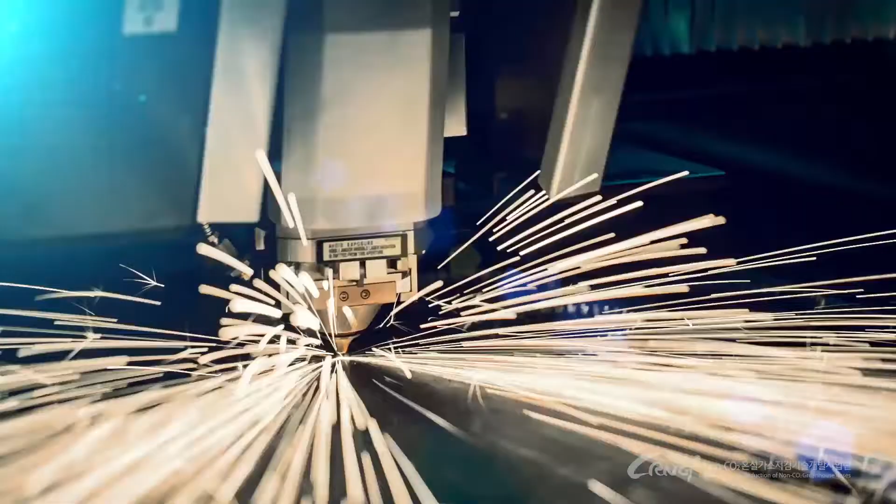A better tomorrow. A tomorrow needs sustainable technologies. Tomorrow needs green pioneers. R&D Center for Reduction of Non-CO2 Greenhouse Gases. We make a better tomorrow.

The Earth we are living in is a home to 7.4 billion people, 300,000 kinds of plants, and 1.5 million kinds of animals. It is a place that we should preserve for our children and future generations. Now, the Earth, however, is suffering from unusual weather and global warming.

Because the cause of this problem is attributed to the greenhouse gases, the United Nations manages to solve the problem. Generally, methane, nitrous oxide, and fluorinated gas are referred to as non-CO2 greenhouse gases. The non-CO2 reduction will be achieved easily by developing a cost-effective unit technology.

To develop non-CO2 reduction technology, Korea launched R&D Center for Reduction of Non-CO2 Greenhouse Gases in September 2013. We are developing the optimal reduction technology for each type of gases and sources.

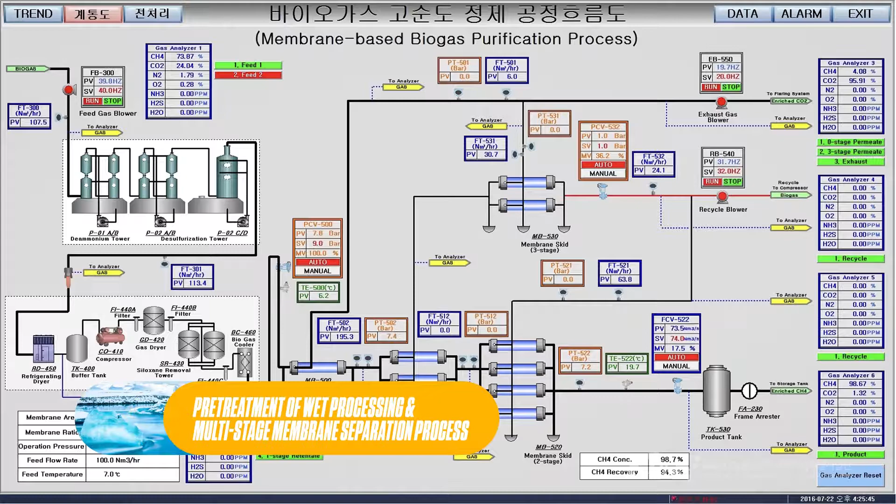This technology process consists of pre-treatment of wet processing and multi-stage membrane separation process. First, equipment to collect digestion gas is installed at the existing food waste treatment site to generate biogas. The biogas generated is pre-treated to remove foreign substances, such as moisture, hydrogen sulfide, siloxane, and ammonia.

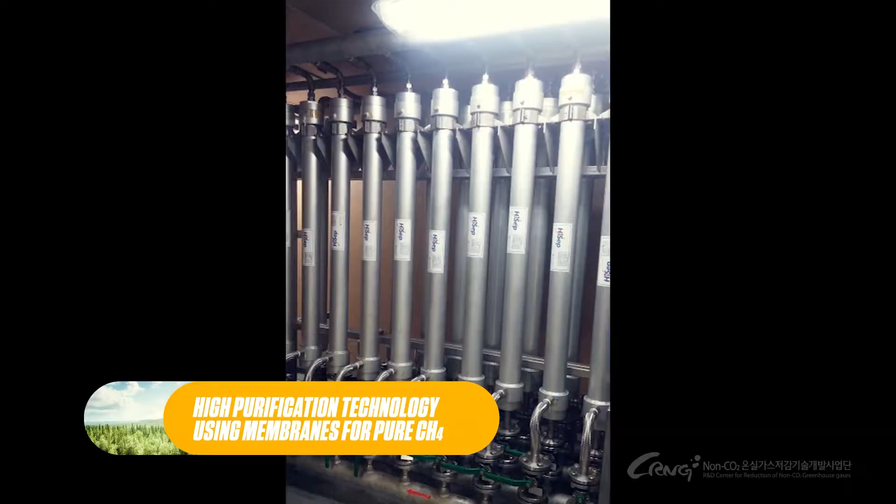And then the carbon dioxide is separated through high purification technology, using membranes, and pure methane gas is left. The newly developed membrane purification technology can reduce the size of a plant to 1/3 compared to existing purification technology, and has many advantages that do not require expensive catalyst and wastewater treatment.

Our methane purification membrane separation plants and original membrane technology using pre-treatment desulfurization technology take on a pioneering role in greenhouse gas reduction, as well as high-purity methane business.

Development of the technology of demonstrating for methane recovery and nitrous oxide treatment from anaerobic digestion gas of livestock manure. Methane with 21 times stronger greenhouse effect than carbon. Technology to reduce greenhouse gas and secure renewable fuel, using biogas as a valuable energy resource.

Our technology is an eco-friendly solution that can purify methane into a high degree of fuel and treat nitrous oxide from biogas discharged from livestock manure by utilizing membrane contactor process as a source technology. The membrane contactor is a process that allows both mixed gas and absorbent liquid to come into direct contact with each other, and then makes a specific gas with high solubility selectively absorbed into the absorbent to separate the mixed gas.

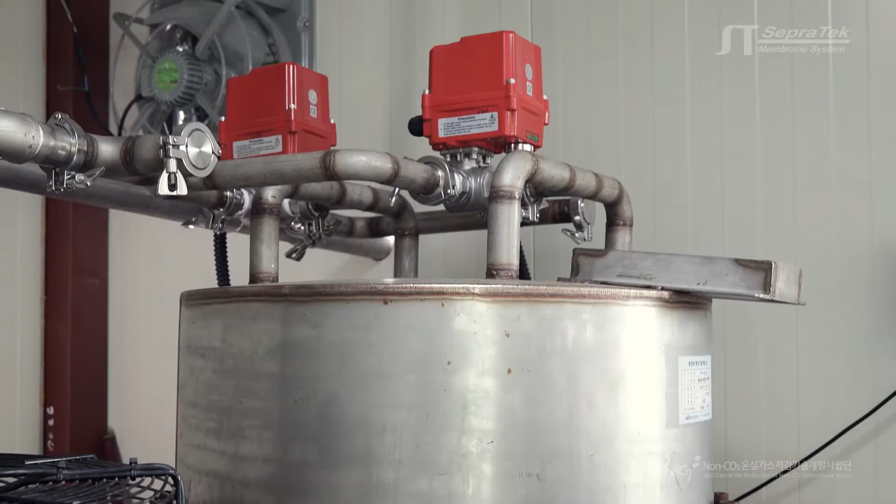This system goes through sequentially the following processes: pre-treatment of biogas, absorption of gas in membrane contactor, desorption of the absorbed gas in membrane contactor, and deodorization and greenhouse gas removal processes.

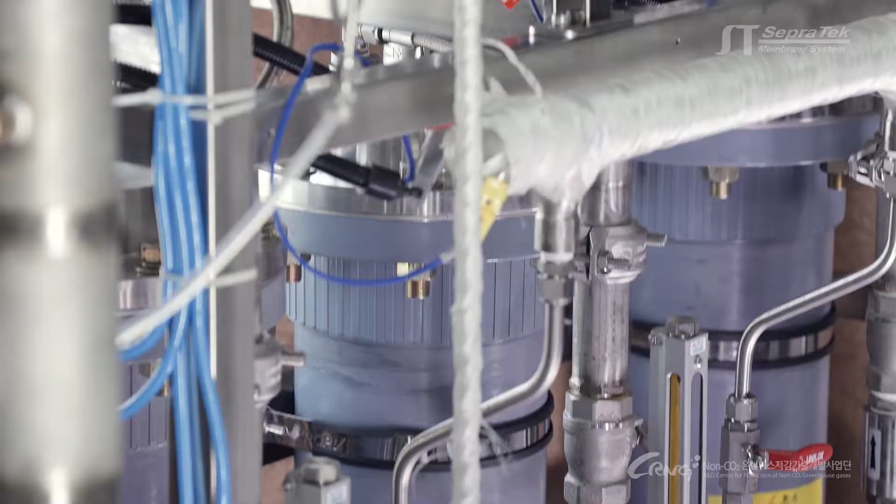The pre-treatment process removes moisture, mist, and dust from the biogas, and the absorption membrane contactor process purifies methane through the absorption of carbon dioxide and hydrogen sulfide into the absorbent liquid from the pre-treated biogas in membrane contactor module.

This technology maximizes the performance of separation technology by optimizing the structure of the membrane module and uses pure water as absorbent so that it can solve problems such as wetting phenomenon of membranes, corrosion of pipes and vessels, and large energy consumption of regeneration of corrosive organic amine absorbent of the existing membrane contactor process.

It also increases the separation efficiency through increasing the absorption of carbon dioxide and hydrogen sulfide by increasing process pressure.

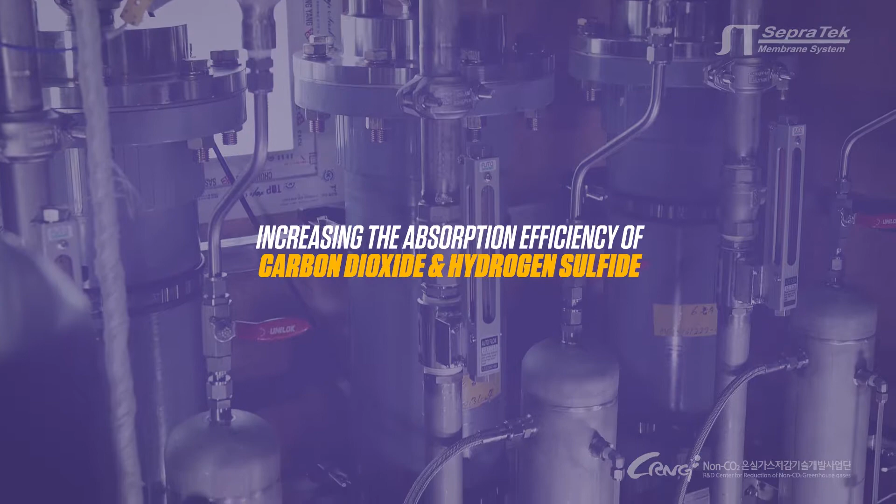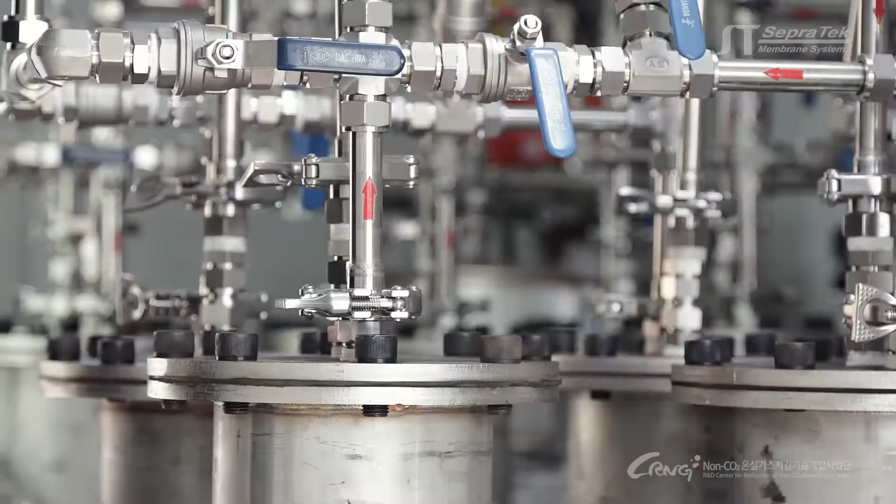The absorbent water is regenerated and recycled in the process through desorption of carbon dioxide and hydrogen sulfide from the water by applying vacuum to the water phase in degassing membrane module. The desorbed hydrogen sulfide will be removed by absorption and deodorization process so that the protection of the air environment

would be achieved. Our technology leads: using biogas as a valuable energy resource, preemption of the technological superiority on the membrane contactor process, and solutions to greenhouse gas problems such as methane and nitrous oxide.

In addition, we can utilize the developed technology in other fields, including natural gas purification, production of ultra-pure water for semiconductors, and desorption process of power generation water and food industry water, which have a big ripple effect.

Direct conversion technology of methane from landfill gas by dry reforming process. Efficient operation and management of landfill gas recycling facility that matches Korea's circumstances and a solution that can be utilized in small to medium scale landfill sites. Landfill methane direct conversion technology.

The main process for collecting landfill gas and ultimately utilizing it is as follows. Gas collection system consisting of landfill gas collecting line, transfer pipe and transfer pump, pre-treatment process to remove impurities in gas, and direct conversion technology that utilizes this.

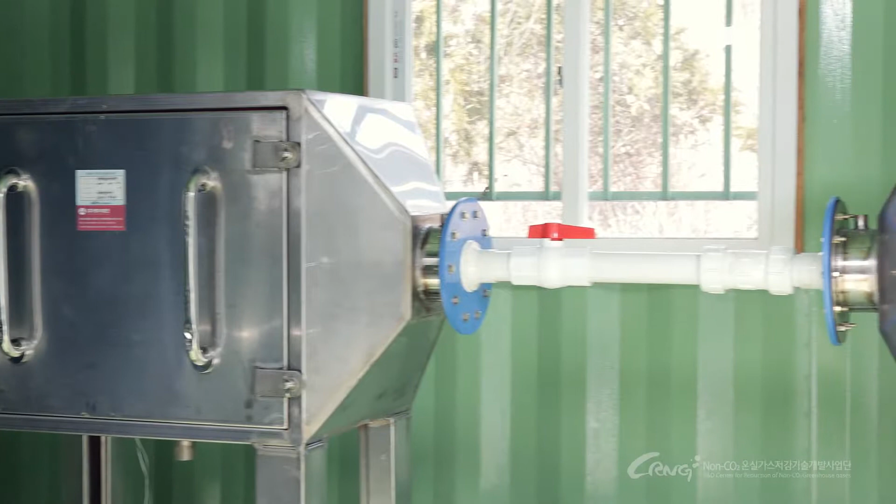The pre-treatment process for removing the impurities in the landfill gas is composed as follows. Buffer tank, inertial impact type heat exchange and dust collector, which simultaneously removes fine dust and moisture, and an absorption device that simultaneously removes hydrogen sulfide and siloxane.

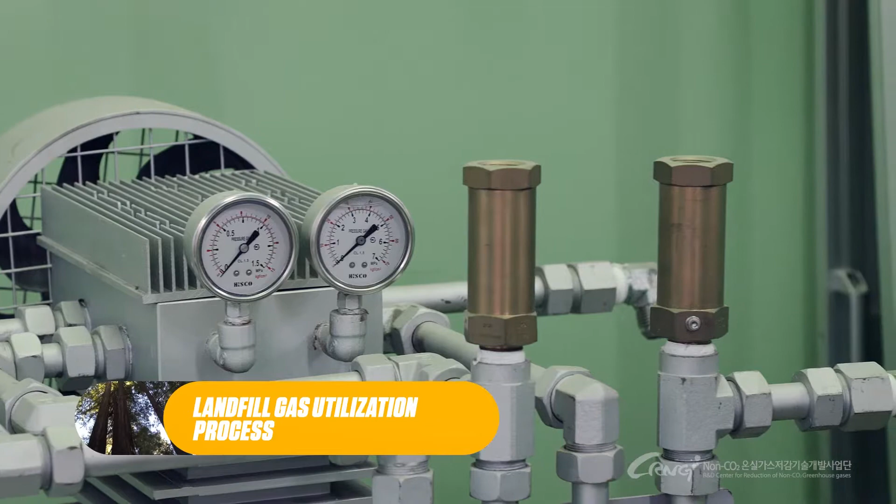Landfill gas from which impurities have been removed through a pretreatment process directly reforms methane and carbon dioxide via a reforming reactor to produce hydrogen and carbon monoxide. Furthermore, it can produce DME fuel through the DME catalytic reaction process and can separate high-purity hydrogen by separating and purifying hydrogen in the reformed gas.

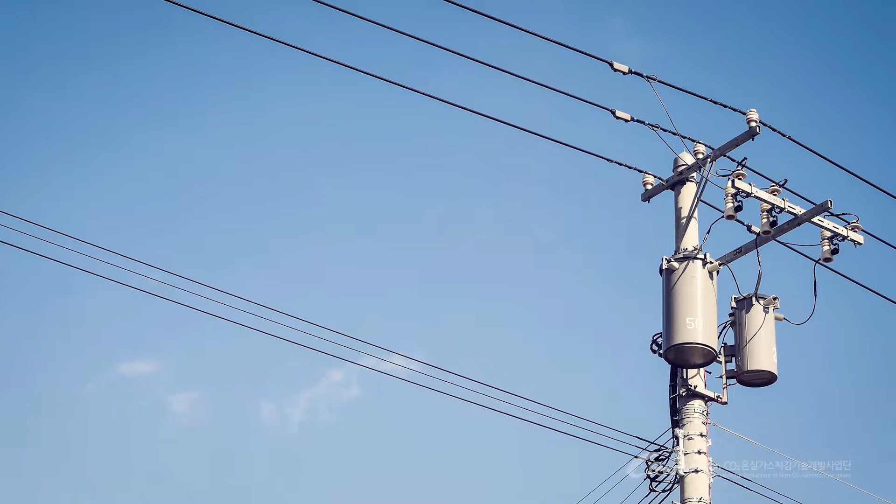In addition, from the economic aspect, we can create an economic effect that will reach $58 million annually, including an alternative energy effect of $33 million and carbon credits of $24 million.

Landfill gas upgrading to methane fuel and conversion of hydrogen sulfide impurity to high-value added biosulfur. Various types of garbage, such as food wastes and construction wastes, are buried in landfill. As they are decomposed, methane, carbon dioxide, hydrogen sulfide, and siloxane are generated.

Methane is a greenhouse gas that shows 21 times stronger greenhouse effect than carbon dioxide, but it can be used as useful fuel when it is separated from the landfill gas. Hydrogen sulfide is a toxic pollutant which must be removed.

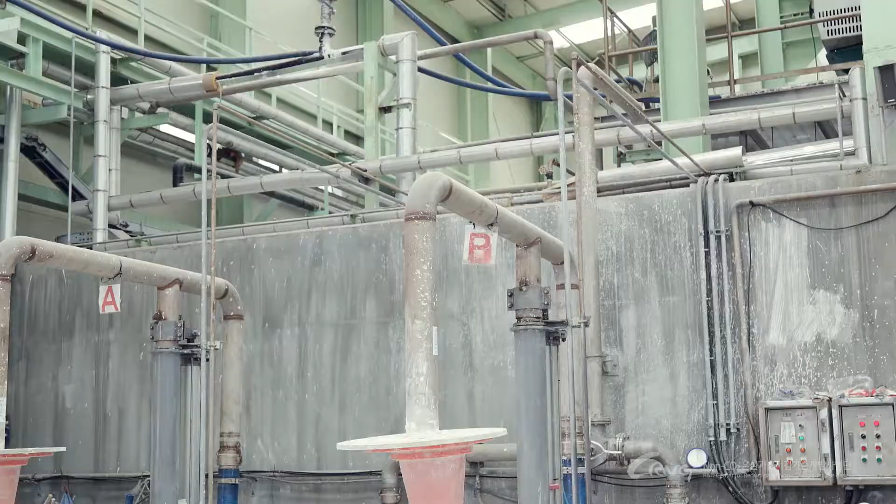In our technology, hydrogen sulfide is collected by an absorption method using aqueous sodium hydroxide solution and is converted to high-value added biosulfur by using bacteria in the bioreactor. Biosulfur can be used as a raw material for cosmetics, a soil conditioner, and an eco-friendly disinfectant which kills various harmful fungi for vegetables, fruits, and ginseng.

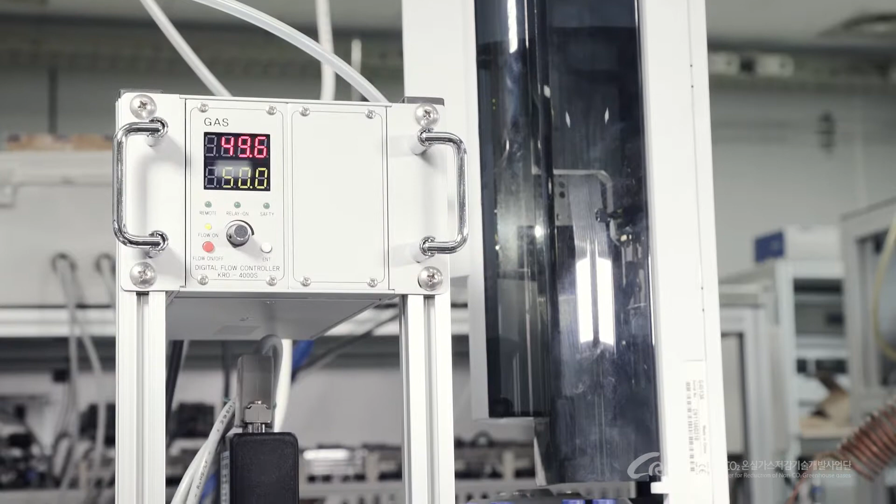After the removal of the hydrogen sulfide, the landfill gas still contains impurities such as siloxane and ammonia. As these chemicals degrade the performance of a heat exchanger, a burner, engine, etc., during the combustion of landfill gas by deposition of polymeric silicon oxides, they must be removed.

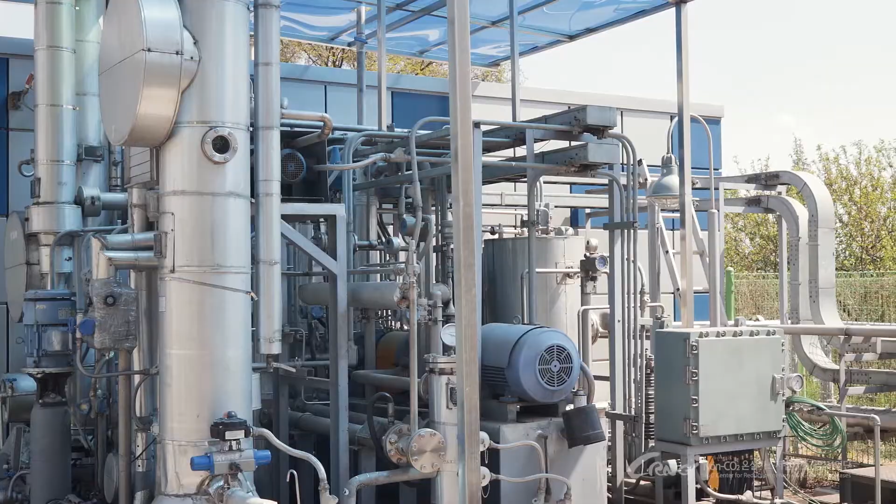Our technology uses a newly developed absorbent, which can be recycled in order to remove siloxane with low concentration, less than 13 ppm, and to completely remove ammonia. Outgas, from which hydrogen sulfide, siloxane, and ammonia are removed in the prior process, consists of methane, carbon dioxide, and air.

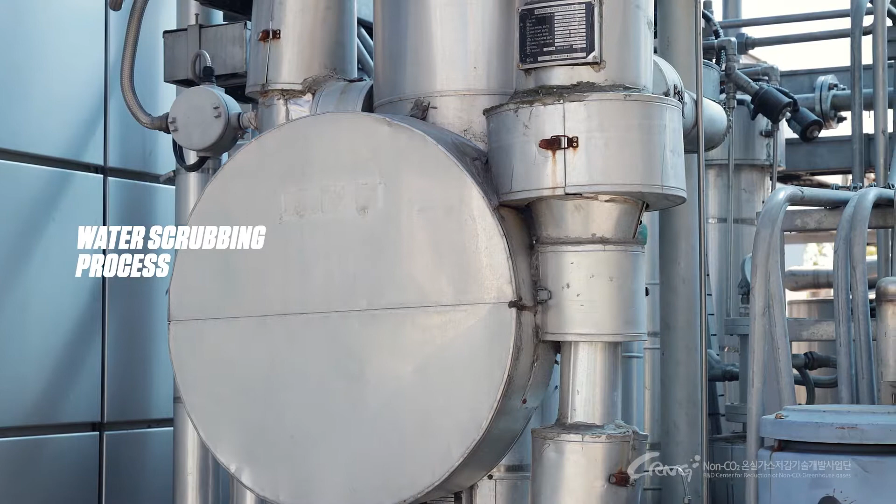Our technology is an energy-reducing and cost-saving method, which uses methane obtained from landfill gas as a fuel to dry sewage sludge instead of expensive liquefied natural gas. Furthermore, by using this technology, we can reduce emission of methane, which is a powerful greenhouse gas emitted from the landfill gas.

Nitrous oxide is commonly known as laughing gas because inhaling it causes a laughing human face by the effects of anesthesia. It accounts for about 6% of anthropogenic greenhouse gas, as shown in the results of various investigations. Nitrous oxide is generated in the atmosphere by the Earth's nitrogen cycle and several natural elements.

The concentration, however, increases every year due to artificial factors, such as agriculture, combustion of fossil fuel, wastewater treatment, and industrial activities. The lifetime of nitrous oxide in the atmosphere is about 120 years, and its global warming potential is 310. The abatement techniques of nitrous oxide include pyrolysis, catalytic decomposition, and electrochemical method.

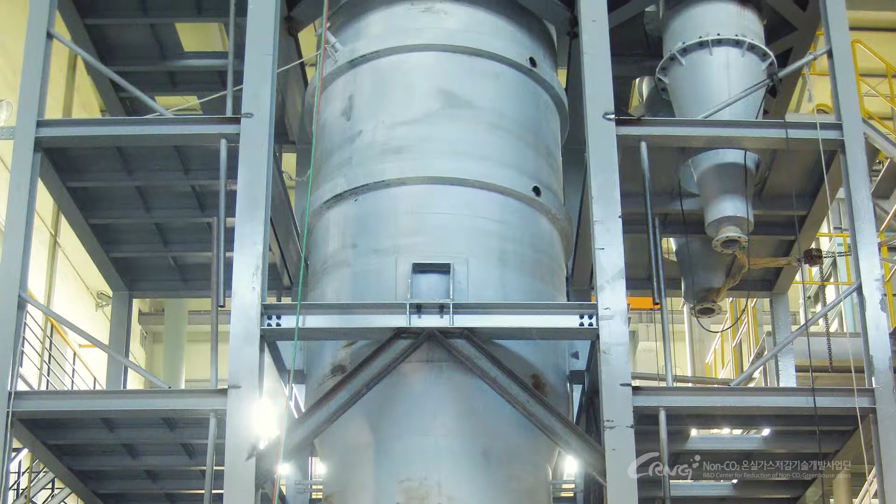Sewage sludge fed into the system is incinerated by heating up with the fluidized bed material and mixing with the combustion air. Unburned gas generated in the fluidized bed is completely incinerated in the freeboard. While the conventional systems utilize sand as a fluidized bed material, our system uses a specially designed catalyst to remove nitrous oxide and reduces nitrous oxide emissions.

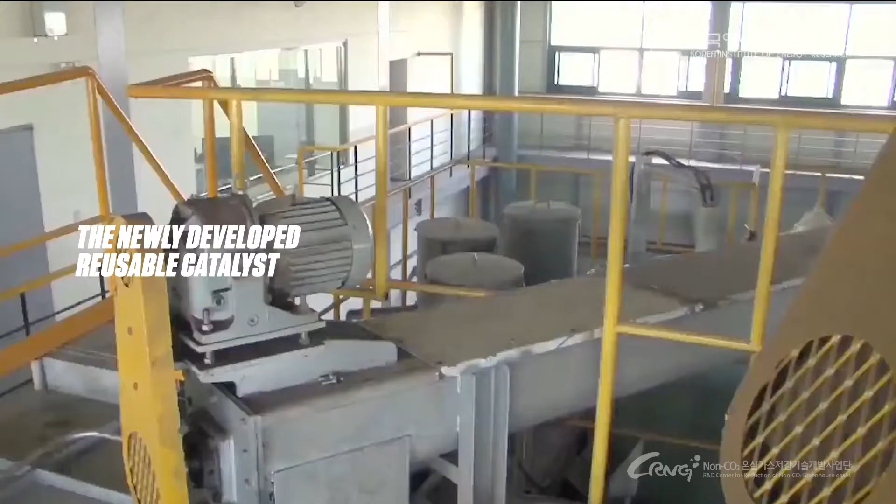Moreover, special nozzles installed on the air distribution plate can improve the mixing efficiency of the dried sewage sludge and prevent local overheating. The newly developed catalyst with high mechanical strength consists of highly active components in nitrous oxide abatement. When ash of the sewage sludge is discharged from the bottom of the fluidized bed incinerator, a catalyst separation device recovers the catalyst for reusing.

In addition, the enhancement of combustion performance can be achieved by increasing the mixing rate of combustion gas with the secondary air injection at high speed. The incorporation of the developed fluidized bed incinerator into a sewage sludge drying system enables stable treatment of sewage sludge at low cost. The developed incineration technology, using a highly efficient nitrous oxide decomposition catalyst as a fluidized bed material, can reduce nitrous oxide in the incinerator without an additional installation of a post-treatment facility.

Furthermore, high decomposition temperatures can minimize the deactivation of the catalyst in the presence of acid gas, such as sulfur oxide. The newly developed fluidized bed material and fluidized bed incineration system to suppress nitrous oxide emissions accomplishes 90% of nitrous oxide reduction and 85% of catalyst recovery.

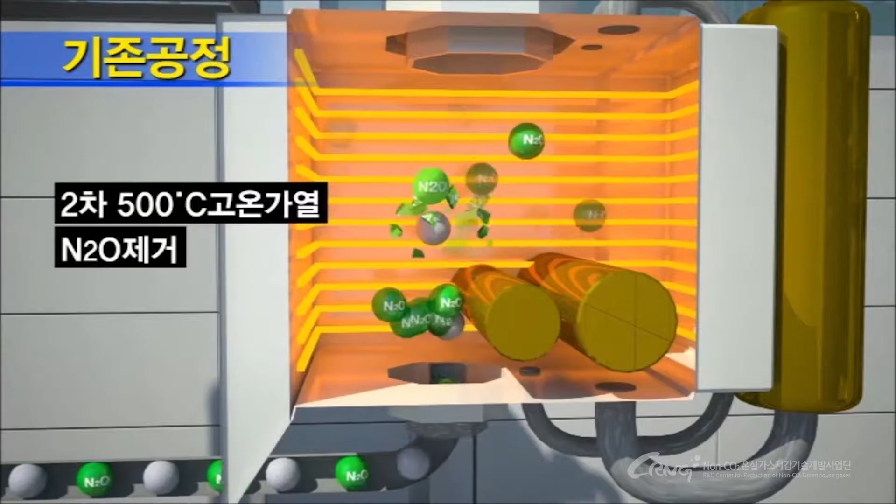Unlike conventional processes to reduce nitrogen oxide and nitrous oxide in two phases, our technology, which is applied to the chemical processes where nitrous oxide is discharged at high concentration, minimizes facilities as it can simultaneously process the two phases in a single reactor, using a single catalyst and a reducing agent. In particular, compared to conventional catalysts operating at high temperatures, the operating temperatures have been closely reduced to the nitrogen oxide reduction temperatures, which can greatly contribute to energy saving.

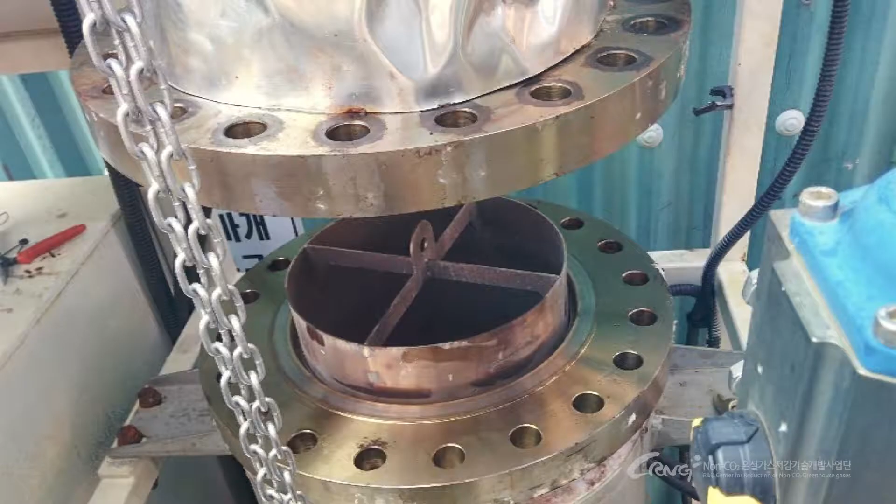Based on the current basic research, we have developed a chemical processing commercial plant with a capacity of 1,000 normal meters cubed per hour. We have achieved excellent nitrous oxide and nitrogen oxide removal performance of 95% or above through demonstration operation of the nitric acid production process.

The combustion process has larger exhaust gas flow rates than other processes and contains a large amount of catalyst poisons. We have developed a honeycomb-type catalyst suitable for the characteristics of combustion exhaust gas and have enhanced the durability of catalysts against poisonous substances. As exhaust gas emitted from the electronics industry contains dust and acid gas, it is very difficult to apply nitrous oxide abatement technology.

The nitrous oxide abatement process for the electronic industry consists of a pre-treatment process and a catalyst reduction process. Dust and acid gas are removed in the pre-treatment process. Nitrous oxide decomposition catalysts, considering the characteristic of fluctuating concentrations of nitrous oxide, boast more than 80% removal efficiency at 350 degrees Celsius or less.

The nitrous oxide and nitrogen oxide abatement process that shows superior performance over advanced technologies has reached commercialization. Our technology can replace nitrous oxide technology, which is dominated by developed countries, with pure domestic technologies, and serve national interests by expanding its business into overseas markets.

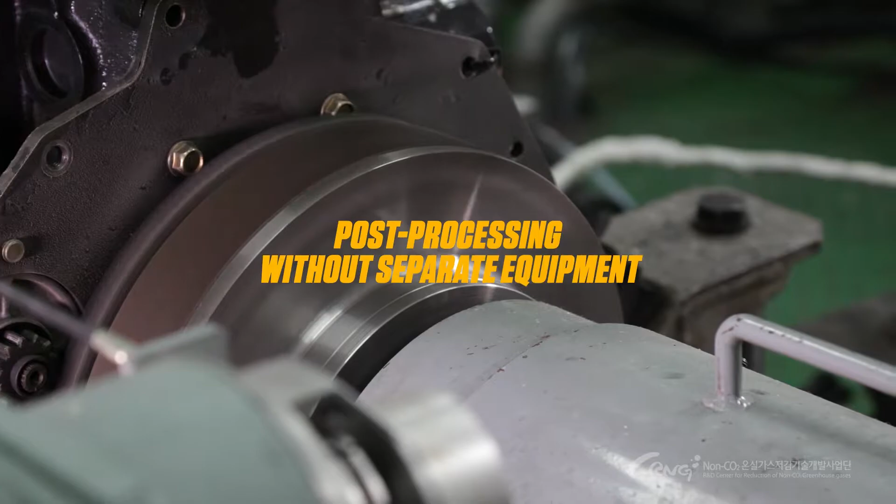The microporous titanium dioxide modified by hydrothermal synthesis and the zeolite catalyst prepared by controlling the ion exchange ratio and mixing at a specific ratio are applied to suppress nitrous oxide generated in the exhaust gas treatment without additional equipment.

We have developed the microporous titanium dioxide with high ammonia SCR stability and nitrogen selectivity at high temperatures and applied it to meet the off-road Tier 4 regulations. And we have reduced nitrous oxide emissions by 1/3 compared to after-treatment equipment.

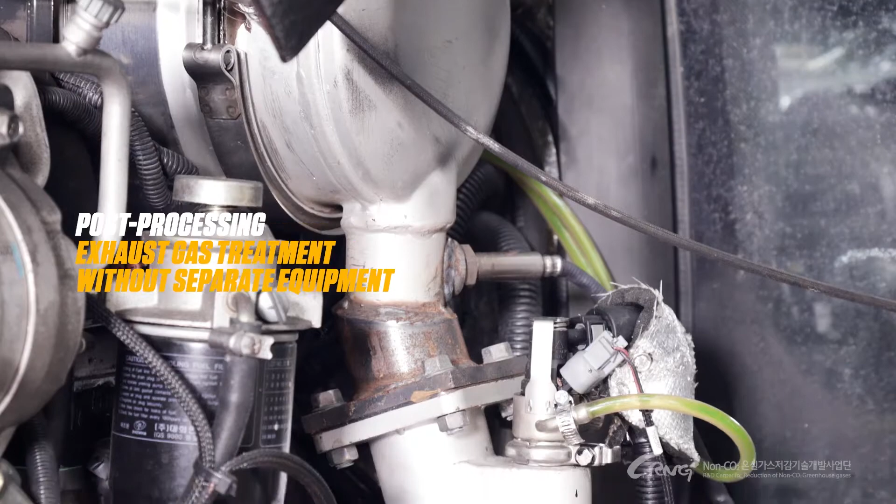We have developed a reaction model to convert urea to ammonia according to the mixer and vane shape. We have designed and developed the urea dosing control unit by engine load and the after-treatment applications. The newly developed nitrous oxide abatement technology satisfies Tier 4 regulations and effectively suppresses nitrous oxide produced in the after-treatment system.

Development of technology for the recovery and purification of high-purity nitrous oxide from industrial emission gases. This technology of recovering high-purity nitrous oxide can reduce the emission of nitrous oxide, which is a non-CO2 greenhouse gas, and abate the global greenhouse effect by recovering high-purity nitrous oxide of 99.999% from emission gases of adipic acid or nitric acid manufacturing processes, which contain 30 to 50% of nitrous oxide.

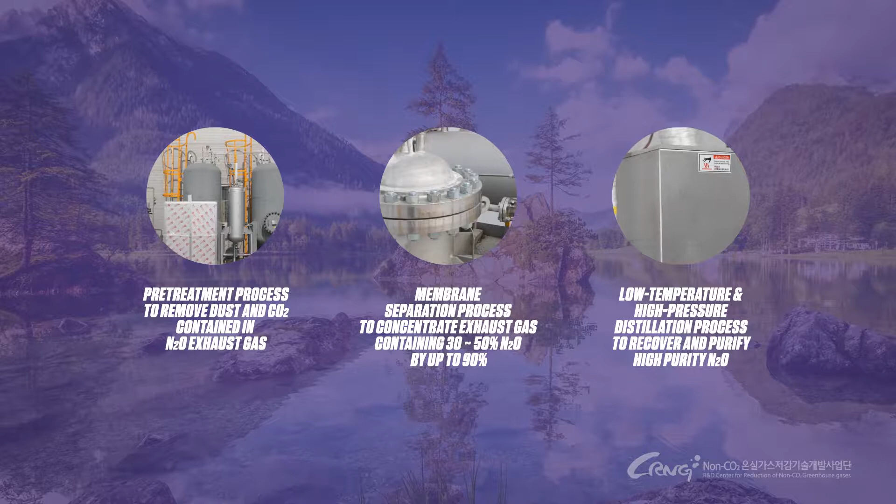High-purity nitrous oxide, recovered, can be used for semiconductor and LCD manufacturing processes as an oxidizing agent and for medical anesthetic. The high-purity nitrous oxide manufacturing process under development in this research consists of a pre-treatment process to remove dust and carbon dioxide contained in emission gases, a membrane separation process to concentrate emission gases containing 30 to 50% of nitrous oxide into about 90%, and a low temperature and high pressure distillation process to recover high-purity nitrous oxide of 99.999% from the gas mixture concentrated by the membrane separation process.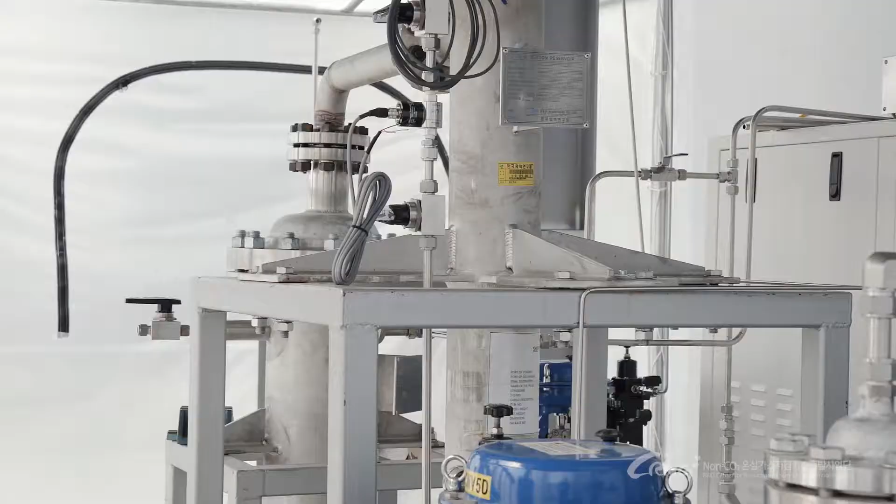We have a plan to complete the construction of the pilot plant for recovering nitrous oxide, including the pretreatment and membrane separation processes, by the second year of this research, and to develop the optimized purification process technology through the operation of the pilot plant in the third year. The recovery process of high-purity nitrous oxide, which we are developing in this research, can generate emission gases containing nitrous oxide of about 1 to 5%.

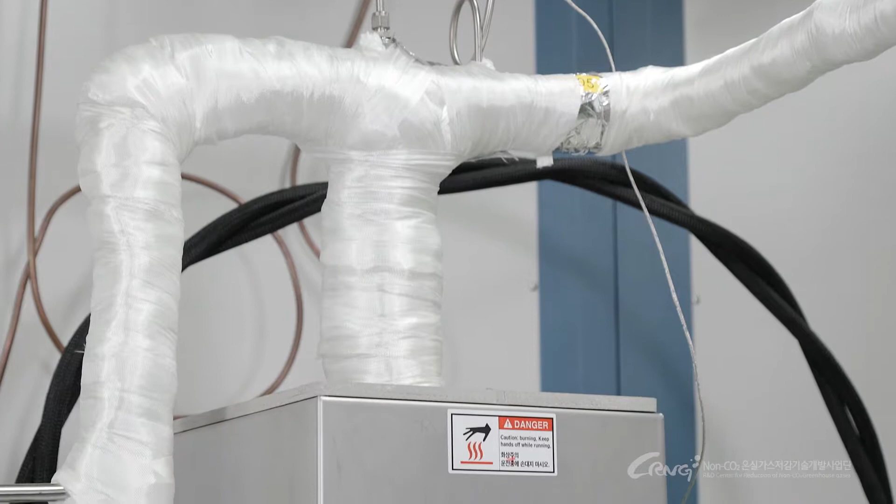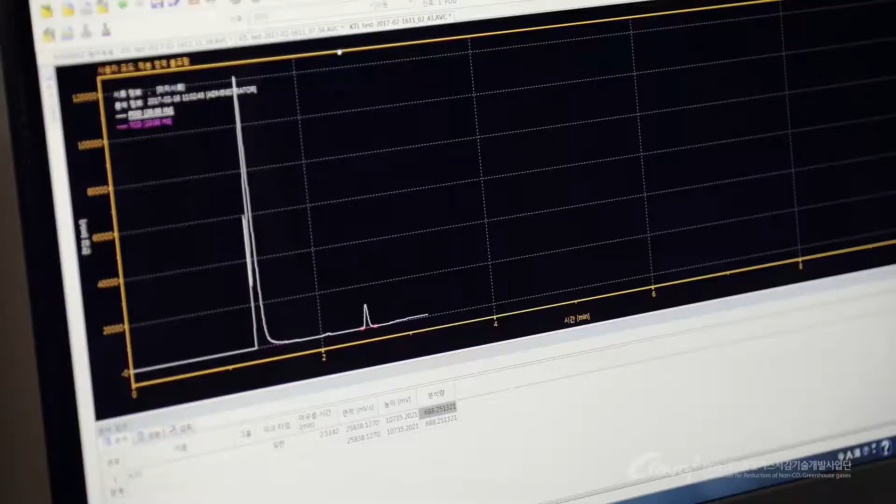To prevent air pollution due to these emission gases, we are simultaneously developing a thermal decomposition technology of nitrous oxide with high-frequency induction heating. The thermal decomposition technology can reduce the concentration of nitrous oxide of the emission gas to less than 100 ppm by decomposing nitrous oxide. This thermal decomposition technology with high-frequency induction heating is the first one in the world, and we will be able to have international patents.

By applying the technology developed in this research to domestic industrial emission gases, nitrous oxide, a non-CO2 greenhouse gas, can be recovered and reused in the industry. Through this, we can reduce about 9 million tons of carbon dioxide equivalent greenhouse gas emissions annually and expect an increase of annual sales of more than $17 million. In addition, we can lead the technologies of recovery and decomposition of nitrous oxide by developing both the process technology of high-purity nitrous oxide recovery and the thermal decomposition of nitrous oxide with high-frequency induction heating for the first time in the world.

Fluorinated gas reduction technology. The main cause of long-lasting man-made greenhouse gas, F-gas. Unlike other greenhouse gases, F-gas has no natural sources and is generated from a variety of industrial fields, such as aluminum and semiconductor manufacturing factories. In addition, the gas remains in the atmosphere for several thousands of years, and it can be decomposed at high temperatures above 1,000 degrees Celsius.

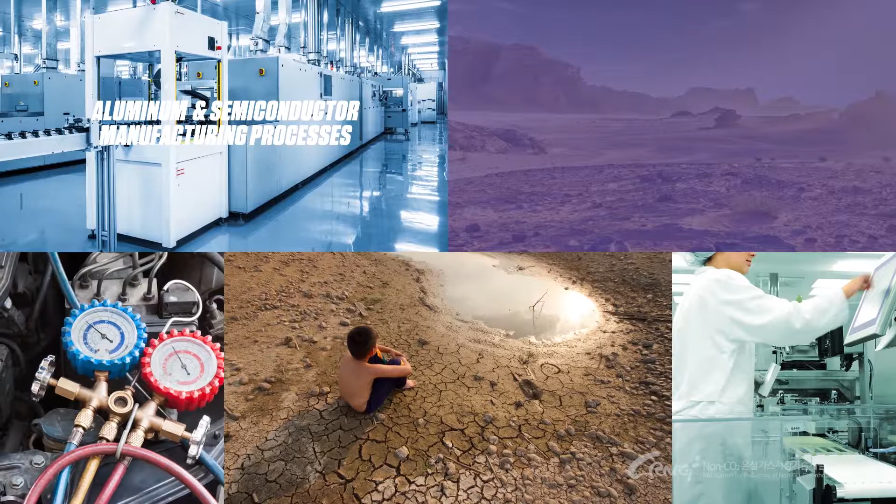F-gas is one of the most powerful and long-lasting greenhouse gases produced by human beings. It can be mixed well and diffused simultaneously in the atmosphere. Since 2013, our center has proposed new strategies to significantly reduce F-gas through the following R&D. Pre-after treatment system for the non-CO2 gas abatement system by use of catalyst and high ionized energy. Integrated system for separation, purification, recovery, and reuse of fluorinated gas emitted from the electronic industry.

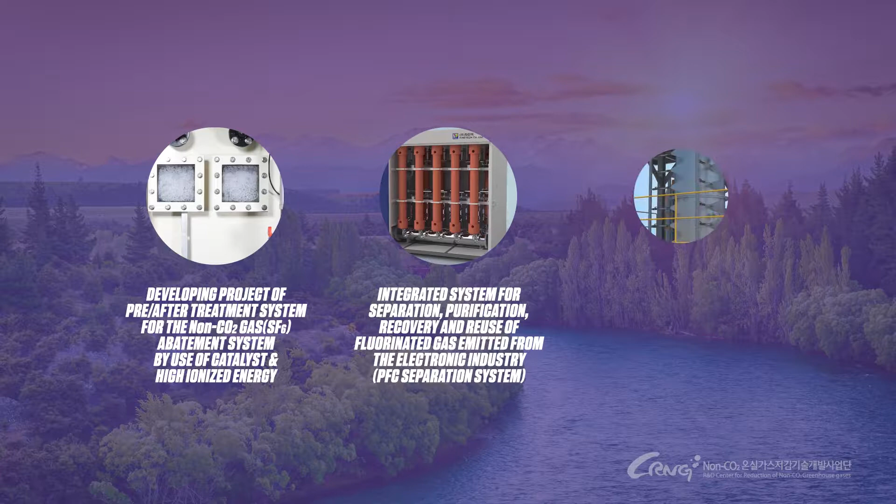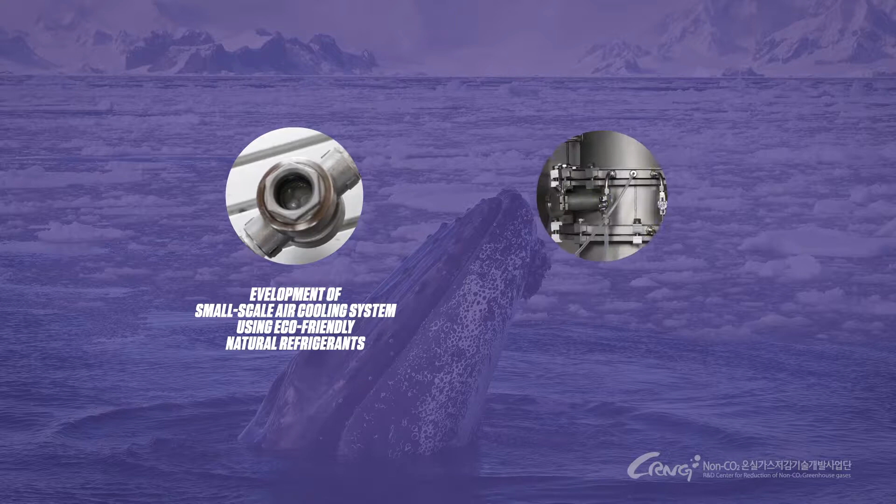Thermal destruction and pollutants control system for used hydrofluorocarbons. High-efficiency recovery and separation technology for discarded refrigerants recycling. High-performance abatement technology for perfluorinated compounds and nitrogen trifluoride with high destruction rate and energy efficiency. Perfluorinated compounds treatment and recycling system using reaction-enhanced RCS. Small-scale air cooling system using eco-friendly natural refrigerants. Greenhouse gas removal system by using combined pump and scrubber technology.

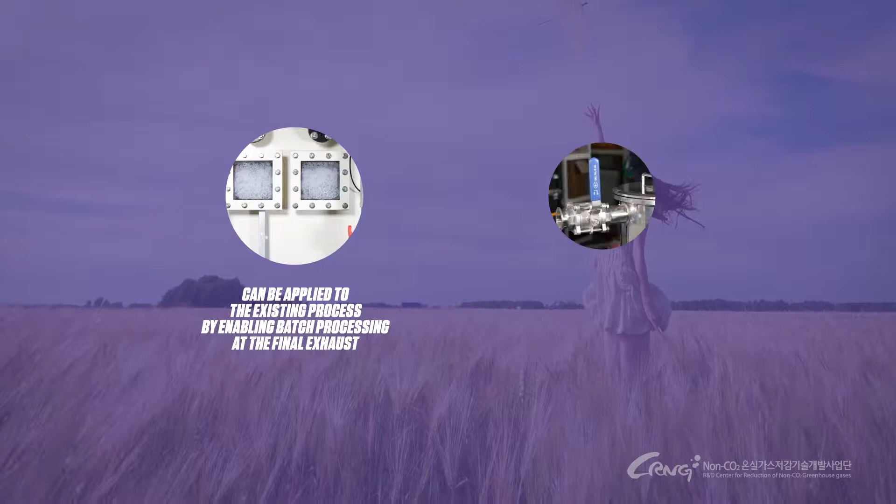Developing project of pre-after treatment system for the non-CO2 gas abatement system by use of catalyst and high ionized energy. Sulfur hexafluoride, which is generated in semiconductor and LCD processes, is a representative gas causing the greenhouse effect. Direct oxidation technology and plasma technology have been used to treat the gas, but reduction efficiency and high installation and operation costs have been problems. Our technology enables batch processing at the final exhaust and can be applied to the existing process. It can perfectly respond to the sulfur hexafluoride problem occurring in semiconductor and LCD processes.

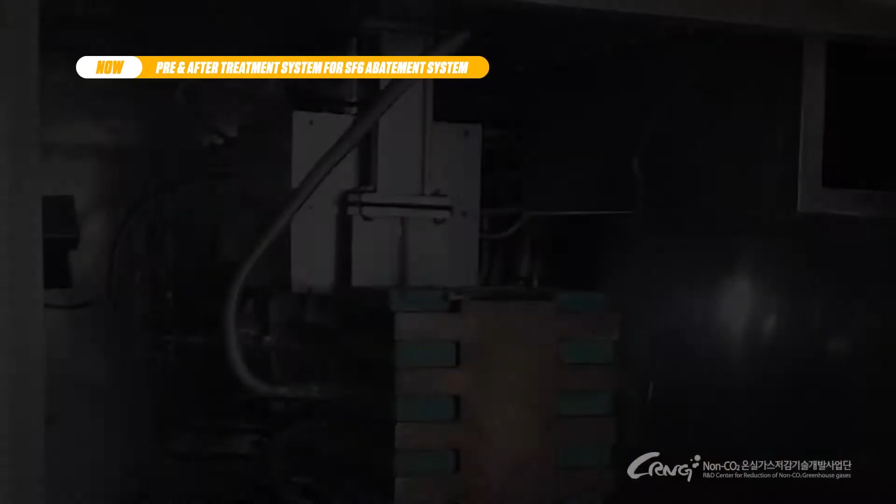Automatic cleaning electric dust collection technology was applied to pre-treat hydrofluoric acid, dust, mist, etc., including sulfur hexafluoride, in the environment of discharging complex pollutants of semiconductor and LCD processes. After capturing more than 95% of particulate matters, it was irradiated with an electron beam that generates high ionization energy to ensure sulfur hexafluoride treatment efficiency of 95% or more.

To discharge some sulfur hexafluoride gas not treated in the atmosphere, catalyst treatment is grafted. SF6 gas activated in an electron beam can react at low temperatures compared to conventional catalyst treatments. As a result, technological advances have been made to dramatically improve performance and lifetime of a catalyst.

Sulfur oxide and hydrofluoric acid generated after the decomposition process are treated by the simultaneous absorption system in the final step. The structure, considering the fluid velocity and the increase of a cross-sectional area for absorption performance, is reflected to build the stable final air management system. Our system is applicable to both existing plants and new plants that do not have greenhouse gas treatment facilities, leading to reduction of greenhouse gas emissions with high treatment efficiency and low installation and operation costs.

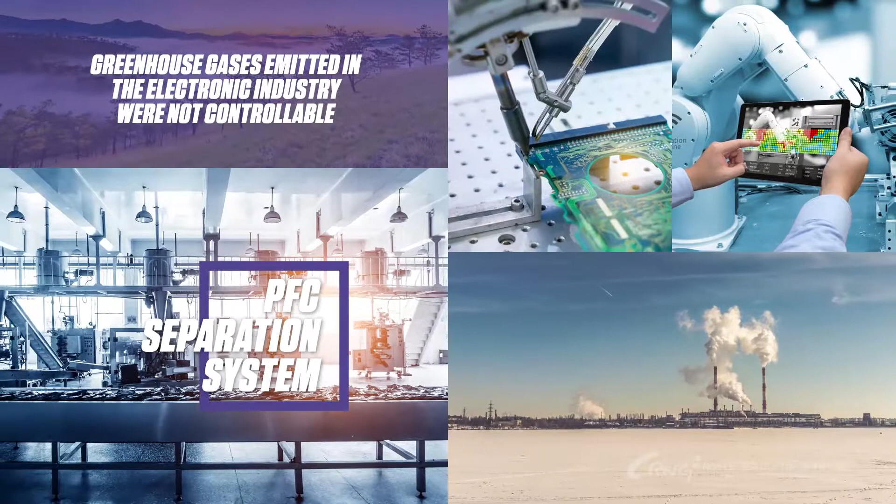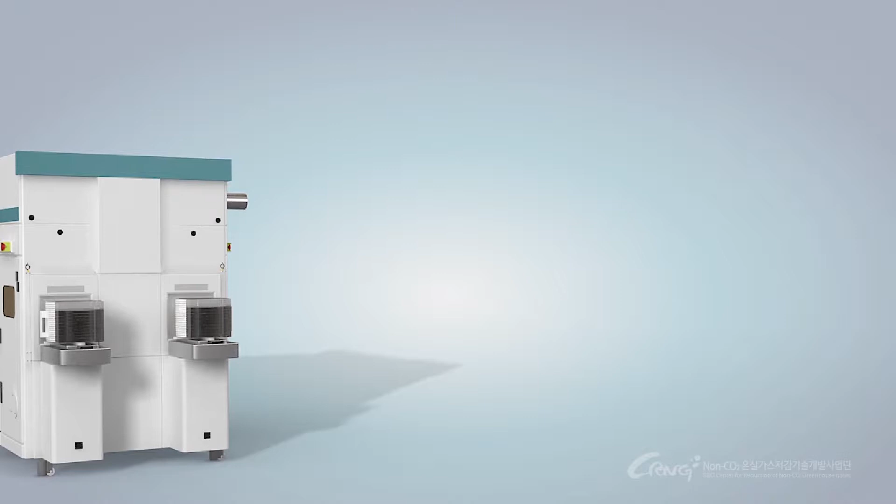Integrated system for separation, purification, recovery, and reuse of fluorinated gas emitted from the electronic industry. Many of the greenhouse gases emitted in the electronic industry were not controllable. Our technology is a new perfluorinated compound gases separation system that can separate nitrogen and PFCs gases and reduce unnecessary energy loss from existing methods that require large amounts of energy to treat perfluorinated compounds in the exhaust gas.

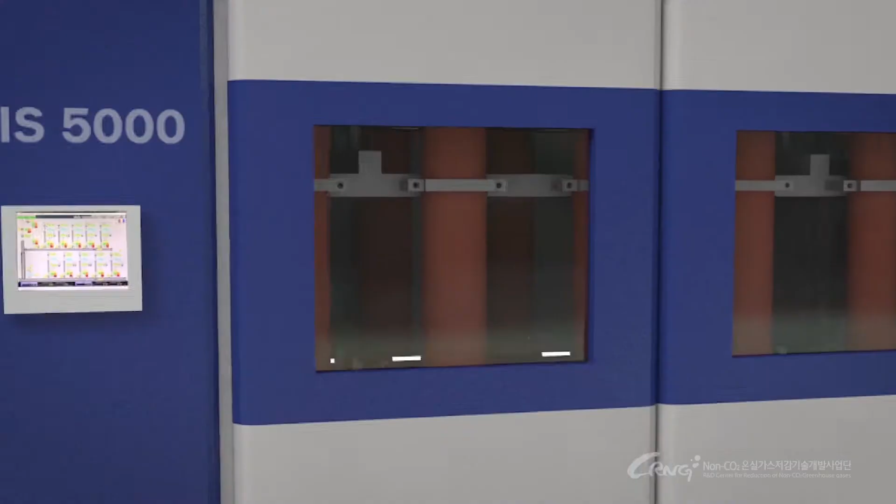The water cyclone process, or a pre-treatment process, removes powder, moisture, and acid gas contained in the exhaust gas, compresses the exhaust gas by a gas compressor, and supplies it to the system to maintain stable system performance, even in long-term operation. Our system separates the perfluorinated compounds gas through hollow fiber membranes connected in parallel.

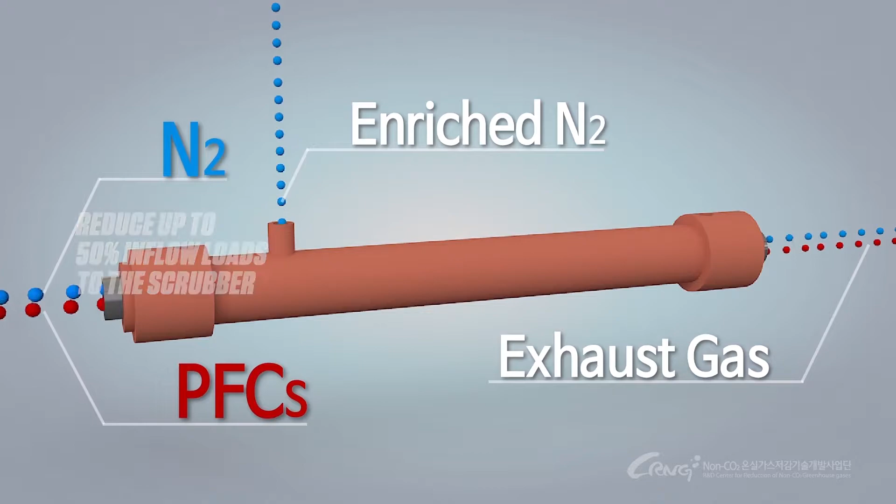Nitrogen is discharged into the air, and concentrated perfluorinated compounds gas reduces inflow loads to the scrubber by up to 50% based on the recovery rate of 95%, through which we can expect low expenses and high efficiency, from increase of treatment efficiency to reduction of treatment expenses and greenhouse gases.

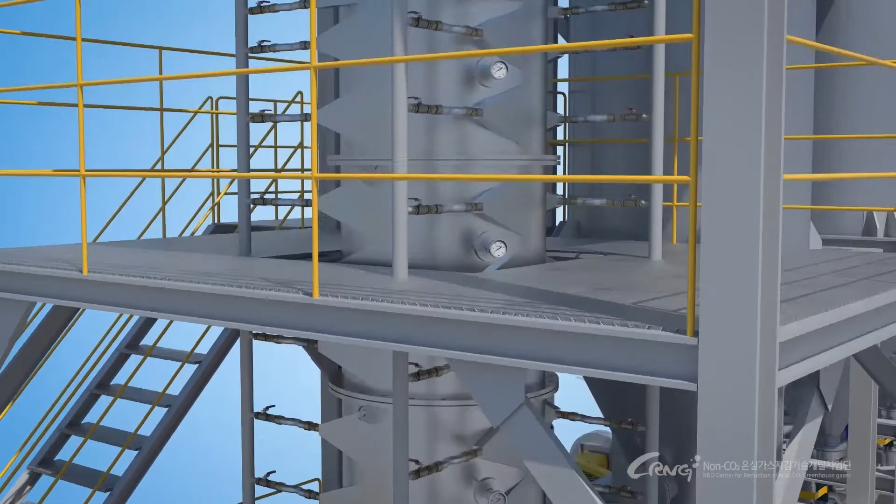Thermal destruction and pollutants control system for used hydrofluorocarbons. Thermal destruction technologies are applied to treatment of hydrofluorocarbons, a used refrigerant generated during disposal of various air conditioners and refrigerators. But treatment cost is expensive and a large amount of fossil fuel is consumed. Our system has adopted a technology to improve the energy efficiency by breaking the highly stable refrigerant at high temperatures, and simultaneously to cool the inner wall of a combustion chamber with combustion air.

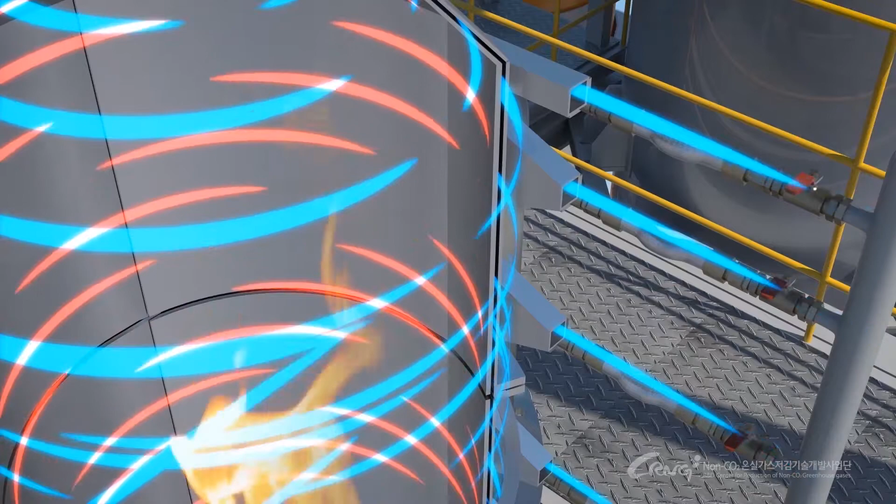The process of disposal of used refrigerants is to inject the used refrigerant after preheating them by using auxiliary fuel to decompose them into carbon dioxide, hydrogen fluoride, and water. Hydrogen fluoride is removed by reacting with the neutralizing agent, and carbon dioxide and water, etc., are discharged through the stack. The wall of the combustion chamber is composed of a double structure, so that the combustion air flows in a fluid path between the outer wall and the inner wall, and rotates 180 degrees along the wall of the double structure.

Combustion air, to help cool the inner wall of the combustion chamber, forms an air curtain and prevents corrosion by acid gases. The combustion air that rotates along the inner wall will join the strong turbulent flow formed in the center of the burner. The used refrigerant supplied to the burner is completely decomposed at maximum temperatures of 1,200 degrees.

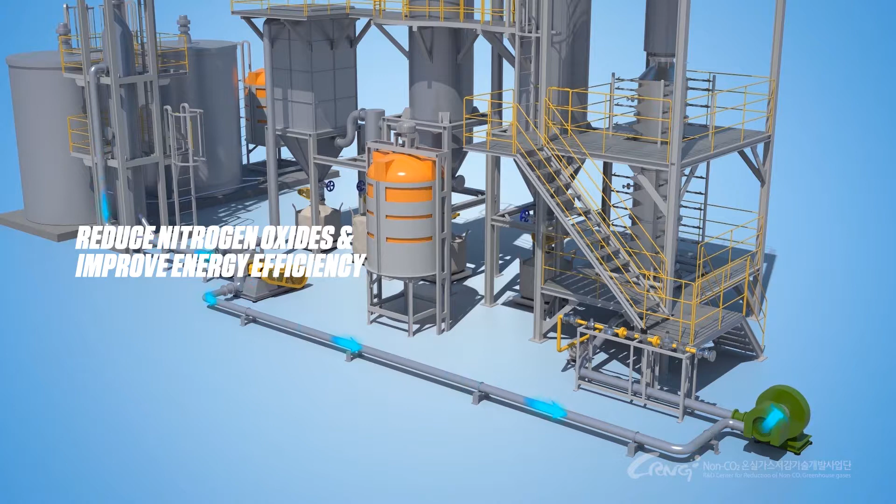In addition, some of the cooling air of the burner used at this time is replaced with recirculated exhaust gas discharged through the chimney to reduce nitrogen oxides and improve energy. The combustion technology for thermal destruction of waste refrigerant is excellent in energy efficiency and can prevent corrosion by preventing combustion gas contact. Our technology is a new system that effectively treats used refrigerants without discharging them into the atmosphere by recycling and destroying hydrofluorocarbon gases.

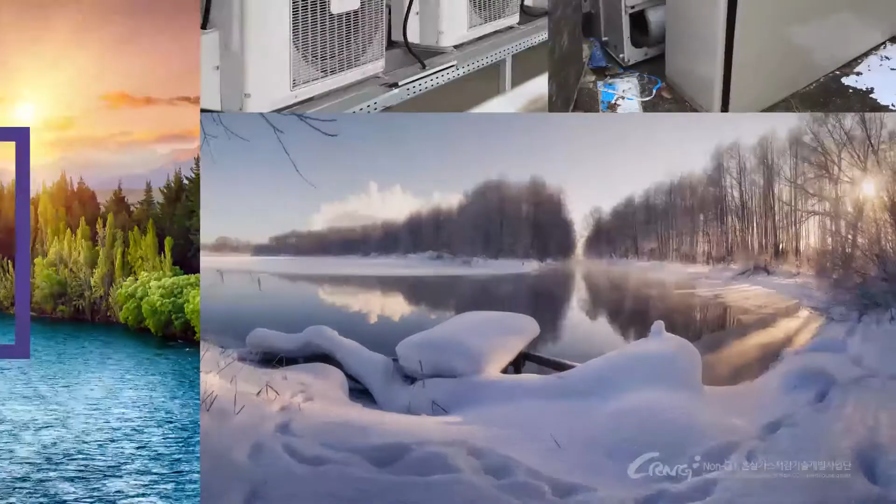High-efficiency recovery and separation technology for discarded refrigerant recycling. Hydrofluorocarbons, one of the greenhouse gases, are used as refrigerants for household and industrial air conditioning equipment, but they are substances that increase global warming by being illegally discharged into the atmosphere because there is no recycling technology. Our technology is the first eco-friendly technology in the country that separates, purifies, and regenerates contaminated or mixed refrigerants with high purity.

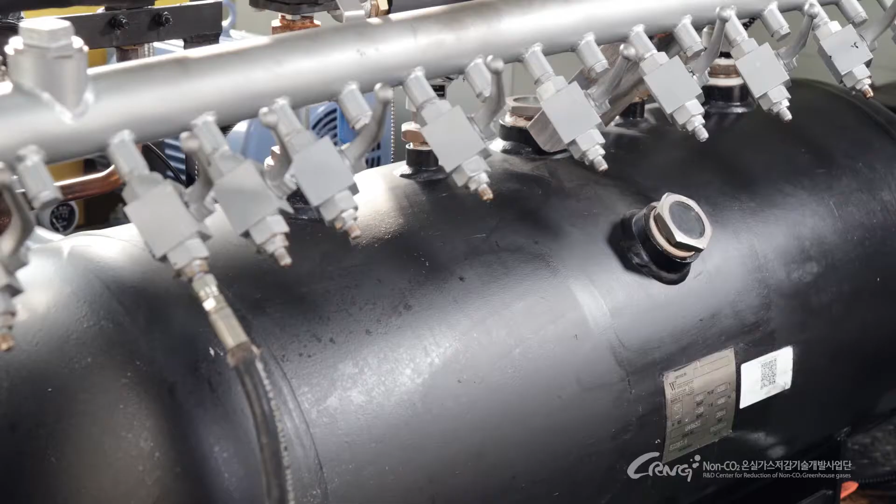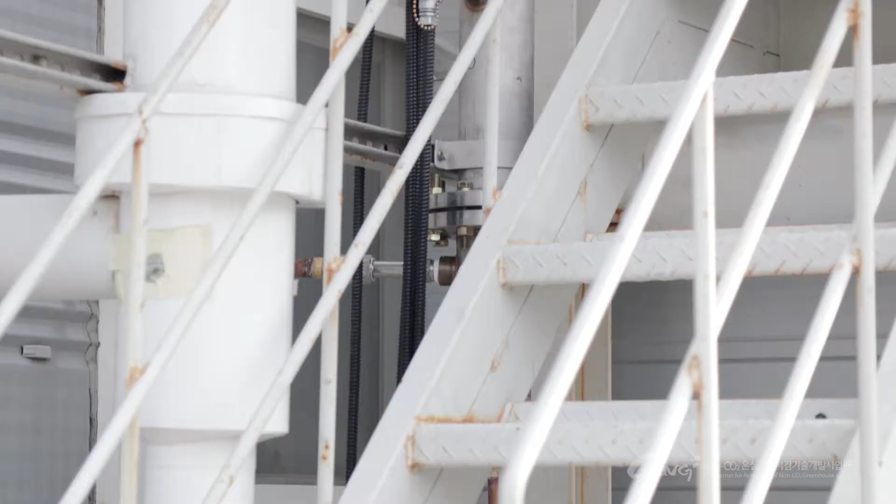A refrigerant boils instantly at room temperature as it has a low boiling point. Each refrigerant has a different boiling point. Our technology sequentially separates and purifies contaminated refrigerants with high purity by using the different boiling point of each refrigerant. When the contaminated or mixed refrigerant is recovered, heated, and vaporized, it flows into the bottom of the distillation tower.

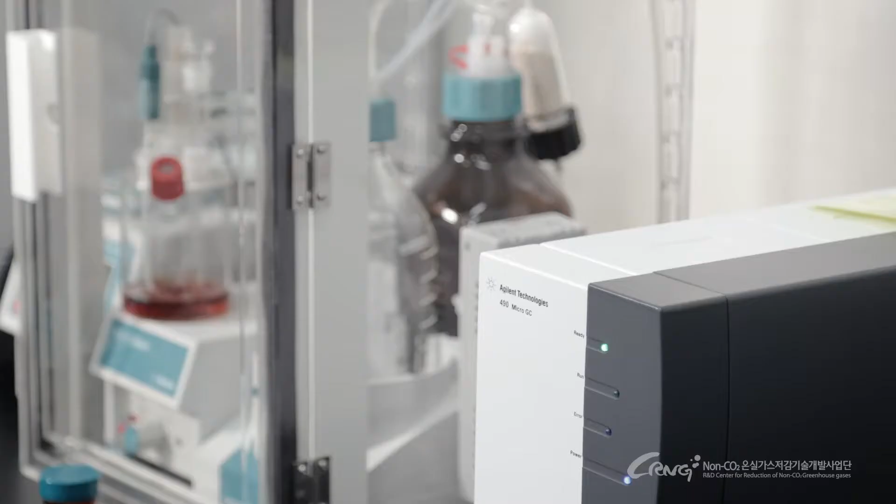In this way, only the refrigerant with a high boiling point is selectively condensed in the distillation tower and collected at a point at the bottom of the distillation tower. Then, moving to the top of the distillation tower in the gaseous state, it is condensed, separated, and purified into a high-purity single refrigerant. In addition, IoT-based technology was developed to operate and control the system 24 hours a day.

Our technology has been recognized by the Ministry of Environment for its excellence and greenness, and we have obtained 4 patents related to the technology. As discarded refrigerants are separated and purified with high purity, it can have an import substitution effect on refrigerant demand, which relies only on imports. And the regeneration of refrigerants that have stopped being produced due to international treaties is a strategic eco-friendly technology which can respond to the demand of national key industries and defense, and contribute to solving the global warming problem.

Development of high-performance abatement technology for perfluorinated compounds and nitrogen trifluoride with high destruction rate and energy efficiency. This development is supported by the R&D Center for Reduction of Non-CO2 Greenhouse Gases, funded by the Korea Ministry of Environment as the Global Top Environment R&D Program. Perfluorinated compounds and nitrogen trifluoride are non-CO2 greenhouse gases widely used in the semiconductor and display industry, and they should be decomposed before being emitted to the ambient.

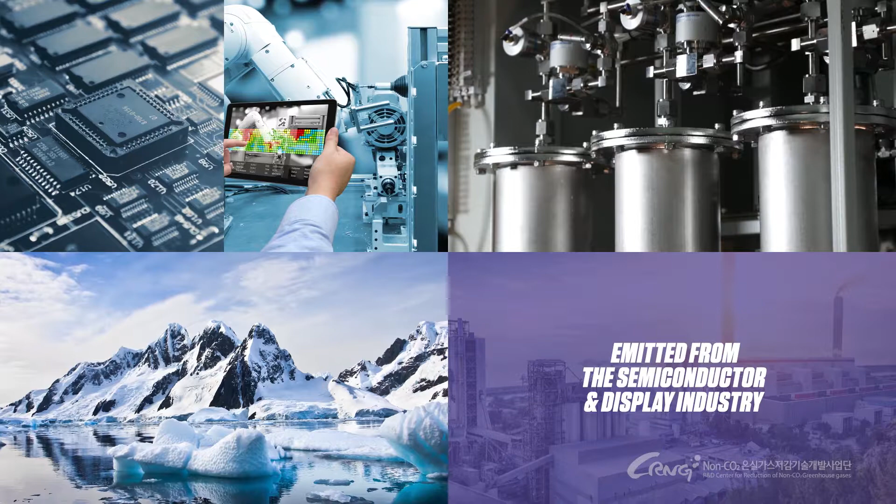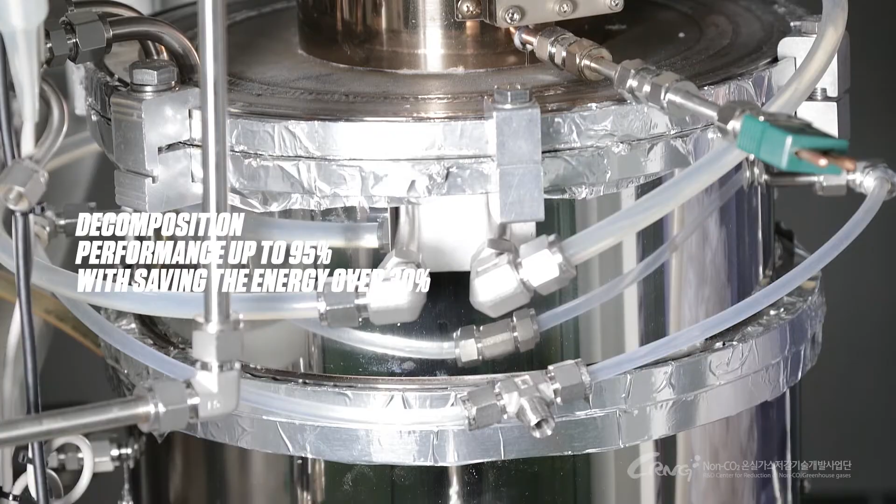Low PFC destruction rate and excessive energy consumption are the biggest issues for conventional abatement systems for perfluorinated compounds and nitrogen trifluoride destruction. In order to overcome these issues, we developed the new abatement system for perfluorinated compounds and nitrogen trifluoride. Our system can destroy perfluorinated compounds up to 95%, saving energy over 30% compared to the conventional abatement system. The key technology is excess enthalpy combustion technology, which can realize effective and energy-efficient destruction.

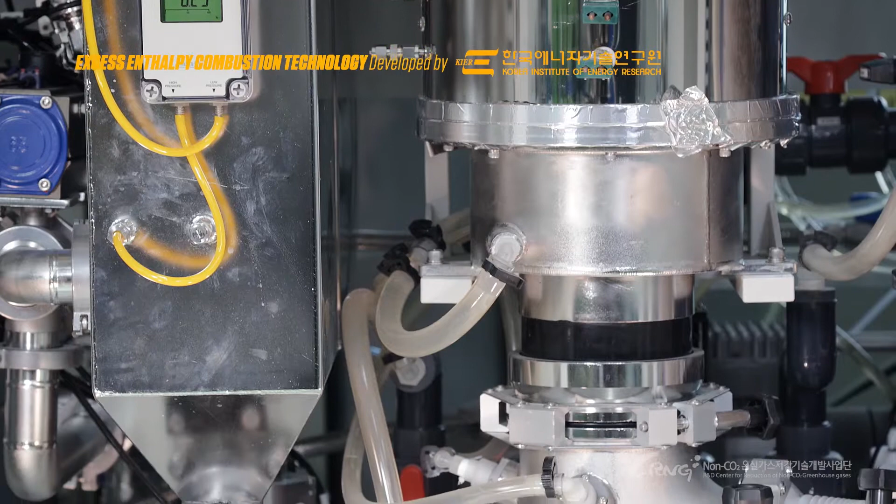Combustion in a porous medium is a sort of self-recuperative combustion. The waste gas, including perfluorinated compounds, mixes with fuel and oxidizer, and then premixed combustion occurs in a porous medium, which has high thermal conductivity and radiation emissivity. So, the high-temperature heat generated from combustion is directly transferred to the waste gases, and this direct heat transfer to the waste gas and internal heat recirculation by the porous medium can realize effective and energy-efficient perfluorinated compounds destruction.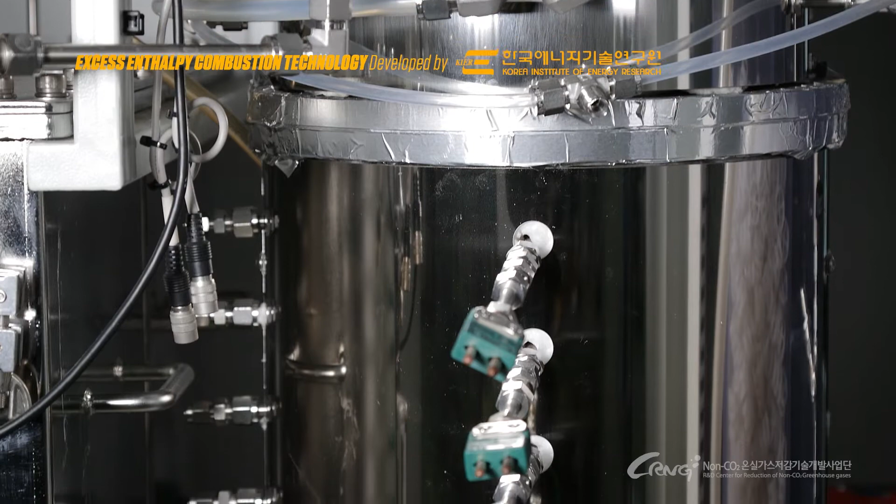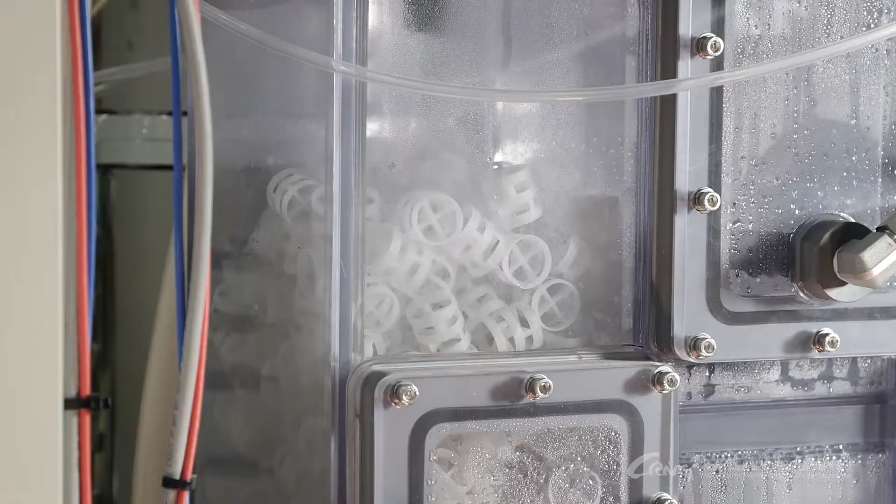Another key technology to realize effective and energy-efficient destruction is appropriate enrichment using pressure swing adsorption technology. The main principle of PSA technology is to separate and exhaust the nitrogen selectively, up to 50% in the waste gases, which decreases the load of the combustor. Dry particle collecting technology is also applied in front of the PSA system. To remove hydrogen fluoride, which is generated in the combustor by destruction of perfluorinated compounds and nitrogen trifluoride, a high-performance wet scrubber is also applied at the rear of the combustor. We expect our abatement system to contribute to improving the atmospheric environment when applied to various industries.

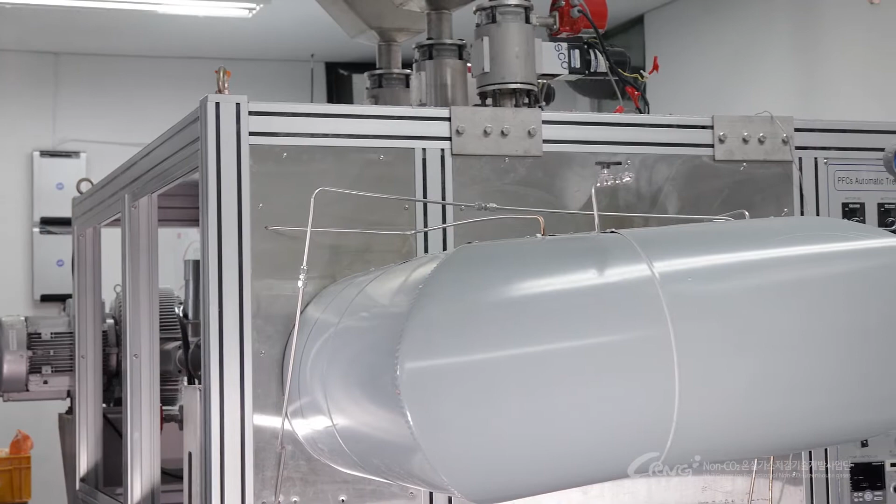Development of perfluorinated compounds treatment and recycling system using reaction-enhanced RCS. About 10 to 50% of perfluorinated compounds used in semiconductor, liquid crystal, and solar cell manufacturing processes are discharged unreacted into the atmosphere. Our system is an economical processing system that can keep energy usage below 0.1 kilowatt-hour per normal cubic meter through low-temperature operation and waste heat recovery.

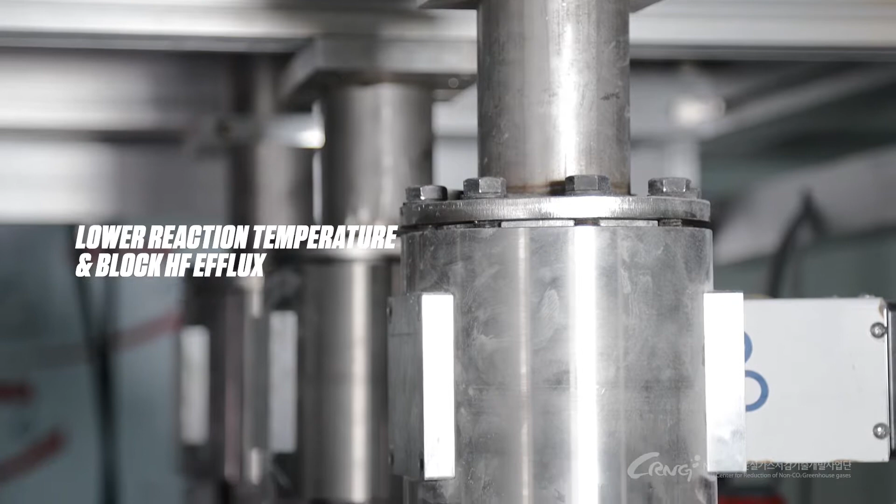Hydrogen fluoride generated during the decomposition of tetrafluoromethane is continuously removed by using solid phase reducing agents such as calcium oxide, calcium carbonate, etc. Innovative technology that can lower the reaction temperature and fundamentally block hydrogen fluoride efflux. These RCSs fundamentally block hydrogen fluoride emitted from the RCS.

To maximize energy efficiency by easy recovery of waste heat through a heat exchanger. To reduce catalyst durability loss by hydrofluoric acid. To maximize energy efficiency and improve catalyst durability by low-temperature operation. To compact the process due to elimination of the back-end hydrogen fluoride absorption process. To recover resources by production of calcium fluoride.

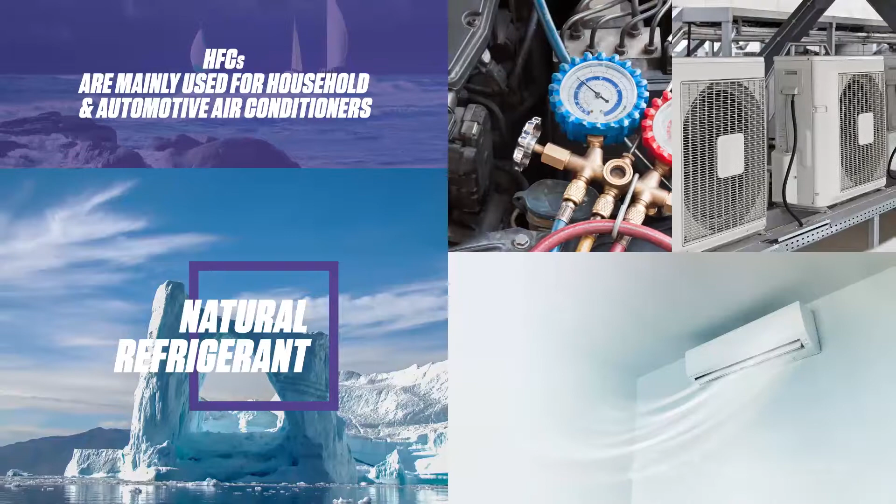Development of small-scale air cooling system using eco-friendly natural refrigerants. Hydrofluorocarbon refrigerants, with very high global warming potential, are mainly used for household and automotive air conditioners. As the global warming problem becomes more serious, there is a growing interest in using eco-friendly refrigerants with low global warming potential to replace such refrigerants. Carbon dioxide is one of eco-friendly natural refrigerants with a remarkably low global warming index. Carbon dioxide is a safe, non-toxic, and earth-abundant natural refrigerant, which was used for decades before synthetic refrigerants, such as chlorofluorocarbons and hydrofluorocarbons, were commercialized.

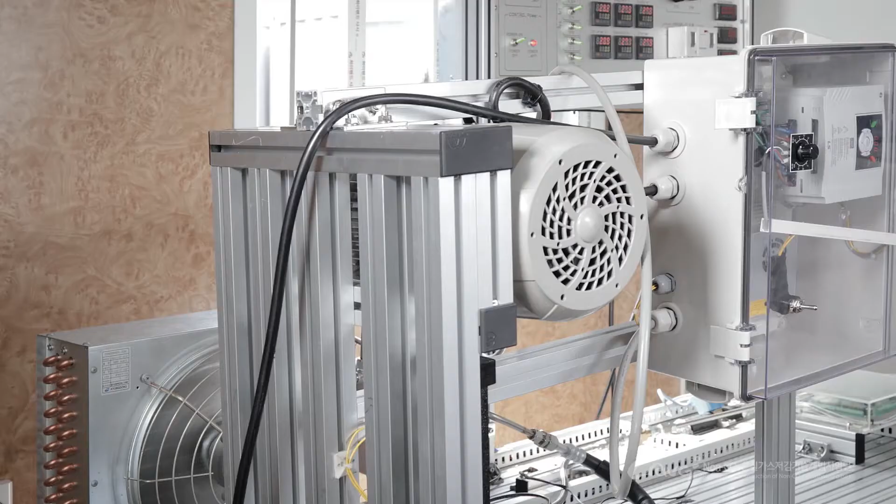However, since the existing cooling technology using carbon dioxide as a refrigerant has an extremely high operating pressure, it has been difficult to apply it to small air conditioners such as household and automobile ones. Our new cooling technology that can effectively use eco-friendly carbon dioxide natural refrigerants, even at low pressure, has the characteristics of safe and easy maintenance. Therefore, it can be used for small air conditioners. Whereas the conventional cooling technology cools using the principle of vaporization and liquefaction of the refrigerant, our technology includes co-fluids capable of absorbing a refrigerant together with the refrigerant in the cooler, and utilizes the principle of absorption and desorption of the refrigerant in co-fluids.

We have first developed the co-fluid candidate materials, which can effectively absorb and desorb a carbon dioxide natural refrigerant and circulate safely and effectively in a cooler. We have also developed the production process of these co-fluids in economic ways. Moreover, we have demonstrated the new air conditioning system using a carbon dioxide natural refrigerant and operating under relatively low pressure by introducing co-fluids in the cooling system. Our technology can reduce the use of global warming gases in air conditioner refrigerants, such as hydrofluorocarbons, by utilizing carbon dioxide natural refrigerant with low global warming potential. In addition, we hope our technology can be easily applied to domestic and automobile air conditioning because of the lower operating pressure of carbon dioxide refrigeration systems with our new technology.

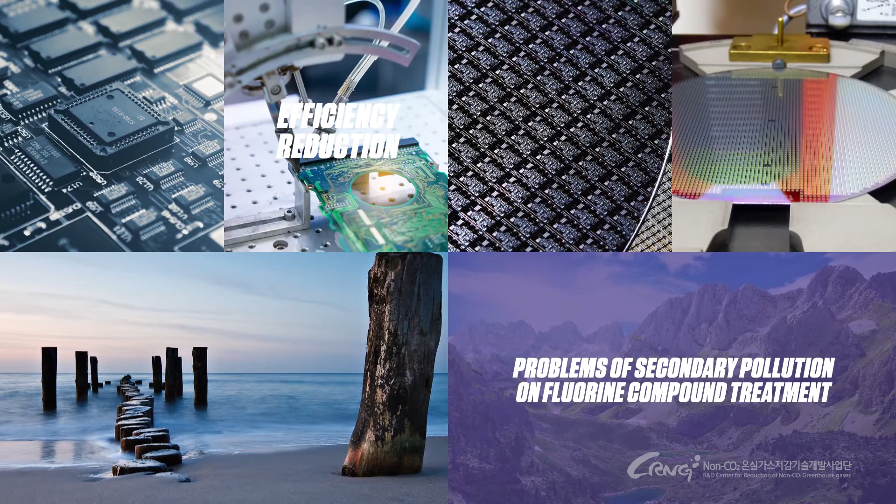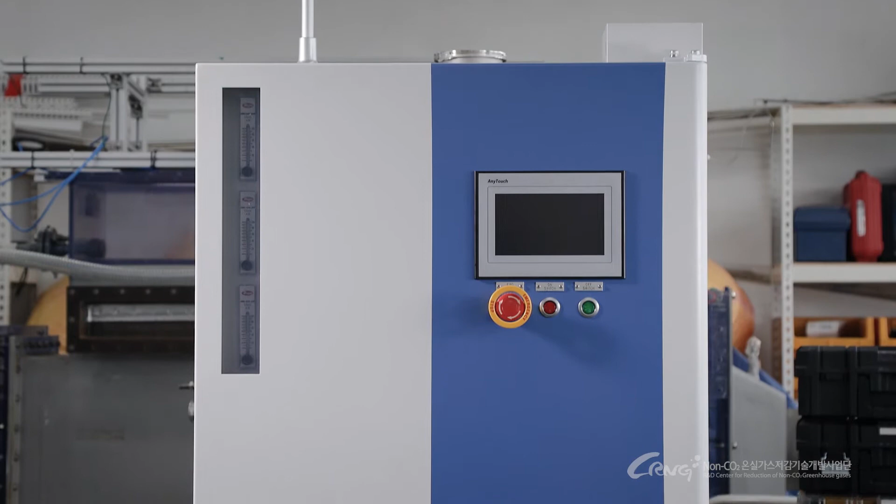Development of greenhouse gases removal system by using combined pump and scrubber technology. Frequent cleaning, operating costs, and excessive energy are incurred due to efficiency reduction of existing POU scrubbers used in the semiconductor process and clogging of piping of a rear pump. In the process of treating fluorine compounds, there are problems of discharging secondary pollutants such as gaseous pollutants and ultrafine particles. We have developed the integrated pump and scrubber greenhouse gas reduction equipment to improve this. Our technology can be installed without the restriction of the internal space of the process by integrating the back-end pump of the main equipment in semiconductor processing with the scrubber.

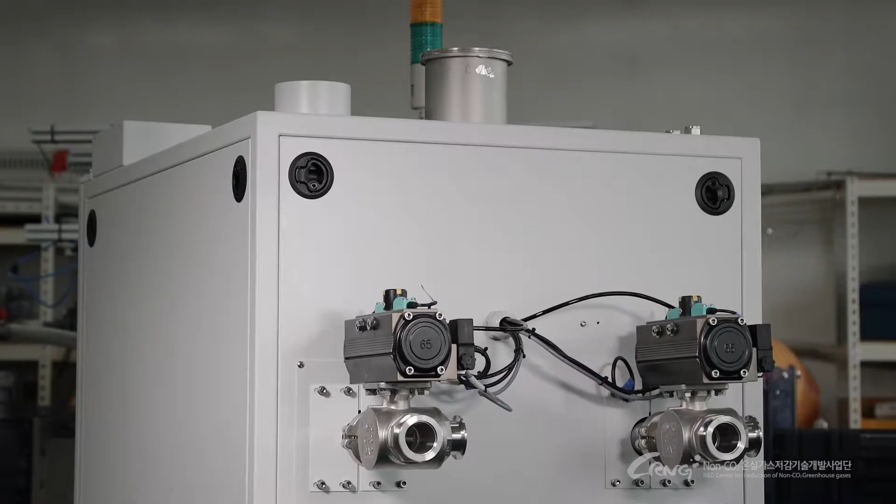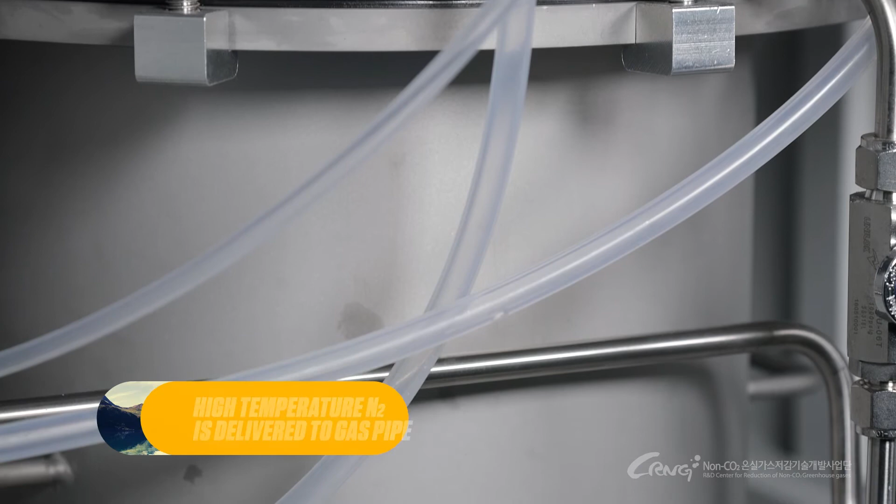And it is possible to save energy by using the POU scrubber, whose structure is different from the existing one when decomposing gas. In addition, as it is possible to easily exchange heat between a pump and a scrubber due to the differentiated utility structure, the prevention of powder accumulation in pump piping and the increase of the temperatures of the plasma improve gas decomposition efficiency, prevent existing heat energy loss, and enable efficient operation by reducing the frequent cleaning cycle. By rotating a nitrogen tube in the pipe wall inside a plasma reactor, the high heat of the reactor is received. The nitrogen, whose temperature has risen, is delivered to gas piping at the rear end pump, and then enters the nitrogen injection section of the plasma torch.

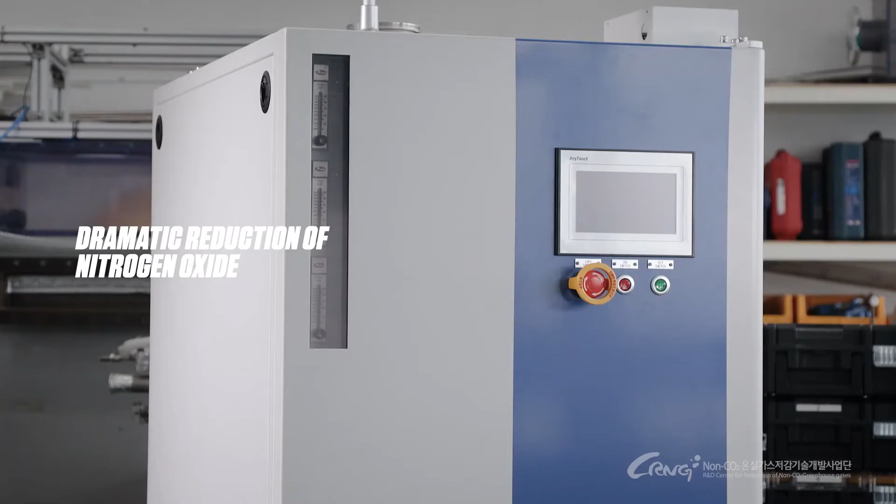This structure increases temperatures before entering the plasma torch to assure the safe combustion of gas, and simultaneously applies a double jacket to the rear end pump where the nitrogen line wraps, to solve the existing powder accumulation and help smooth gas treatment efficiency. In addition, heated nitrogen enters the front of the torch to raise the temperature of the whole fluid, which can keep the internal temperature of the chamber constant with little energy. By combining CDA or nitrogen injection part utility on the bottom of this equipment, efficient cooling is enabled and secondary nitrogen oxide can be drastically reduced. The integrated pump and scrubber system can efficiently treat harmful gas and simultaneously save energy. The technology can be applied not only to the semiconductor process, but also to the treatment of exhaust gas generated in general industry.